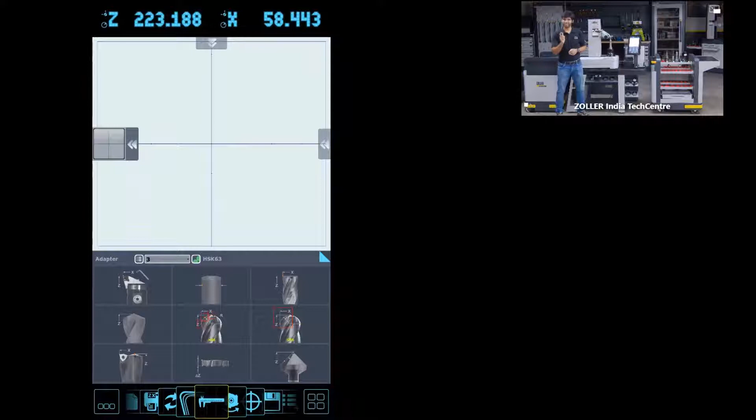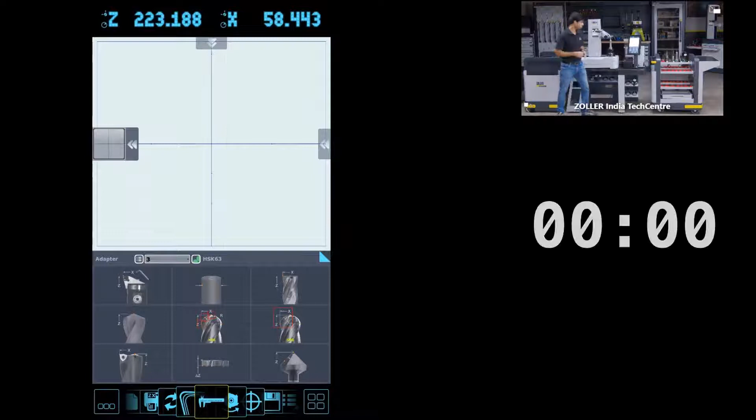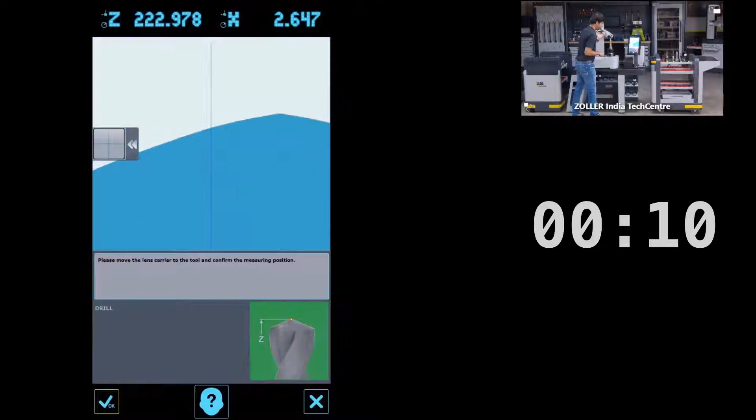Now I'm going to show you how easy it is to measure the height of a drill which we already have clamped onto the HSK63 adapter, and I'm going to do that within 30 seconds. My time starts now. I select the drill option, confirm the adapter which is HSK63, move the camera so the cutting edge is in the field of vision, press OK, and start the measuring process. And it's done—we have the value.

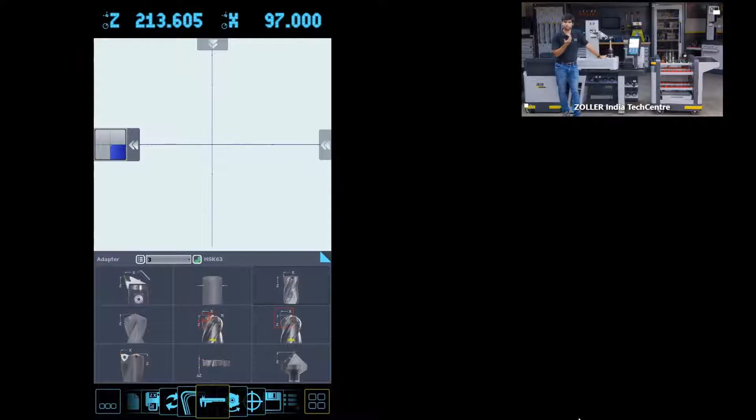Now let's take a look at another macro program, this one for an end mill. I've mounted an end mill here, and this macro is going to measure the diameter as well as the height of the end mill. It also requires us to rotate the spindle by 360 degrees, because it keeps freezing images as we rotate the spindle and gives us the value of the entire rotated contour. The advantage of this macro is that it takes into consideration the radial as well as axial runout when giving us the measurement result.

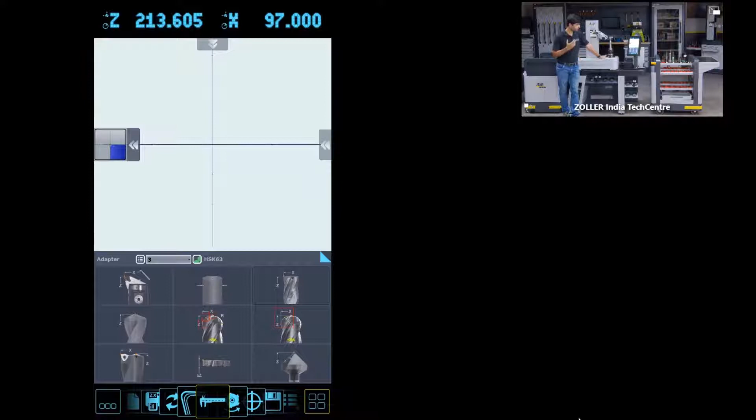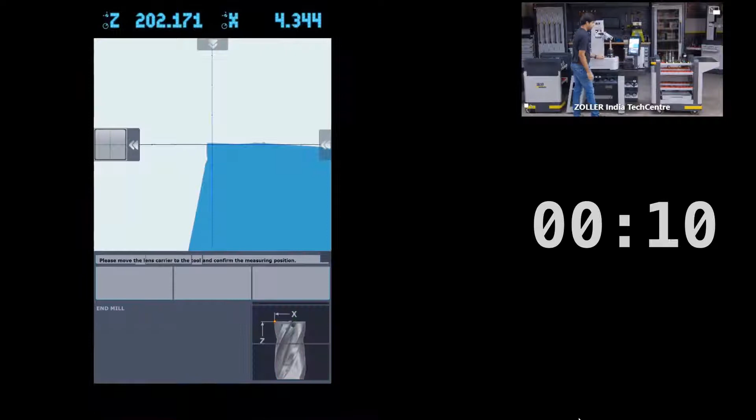And like the drill, I'm going to measure this tool again in 30 seconds. My time starts now: select the end mill, confirm the adapter, move the optics carrier, press OK, rotate the tool by 360 degrees, press OK again, and our measurement result is ready.

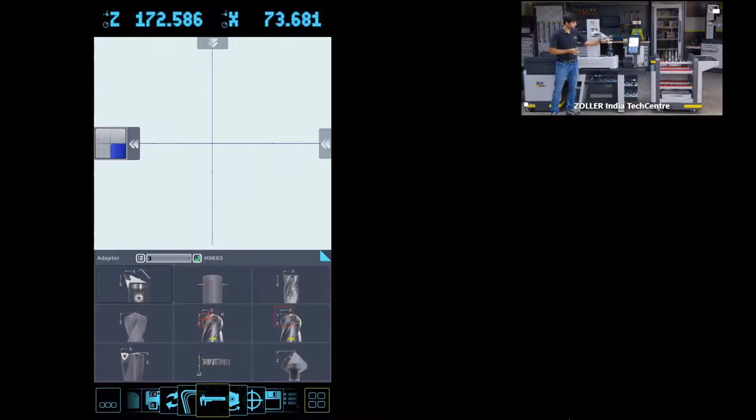Now let's move on to the next tool, the boring bar—one of the most tedious and time-consuming tools to preset, especially on your machining center. Sometimes it takes 5 minutes, sometimes 10, sometimes even half an hour. But on the Smile Compact, I'm going to preset the boring bar to a specified radius, let's say 52 mm, using the special macro for the boring bar, and I'm going to do that within a minute.

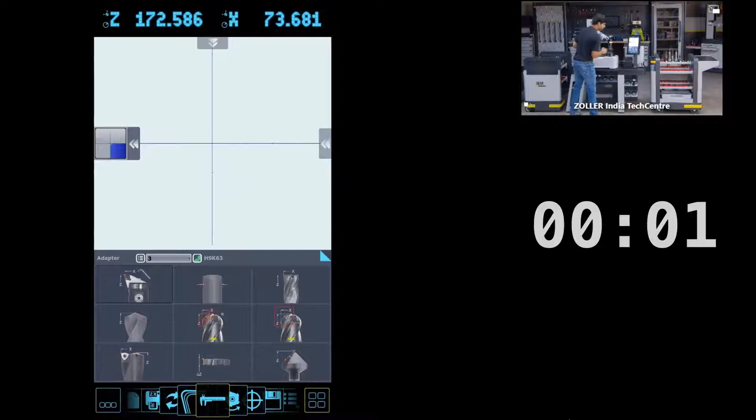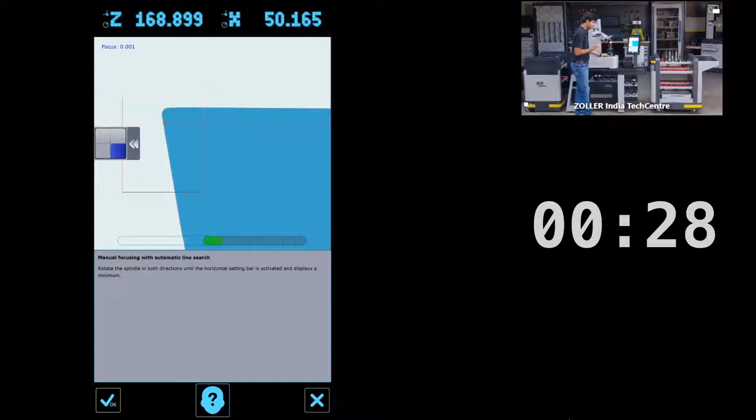My time starts now. I select the macro, confirm the adapter, move the camera so the cutting edge is in the field of view, and set the nominal value at 52 mm. Now it's asking me to focus the cutting edge so it is at its highest point. Now it's focused, I press OK. Then I press the spindle lock button so it doesn't move around when I'm adjusting the boring bar.

And then I adjust the boring bar based on the graphical indication on the screen. What you see here is the real-time value of the cutting edge. I press OK.

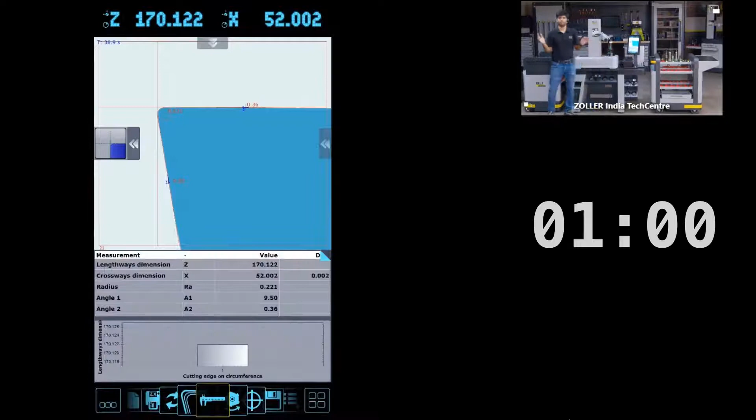And done. So within a couple of microns, we have set the boring bar to the specified value of 52 mm.

Now I'm going to talk about the page where you can create your own tool measurement programs and save them in the library for further use.

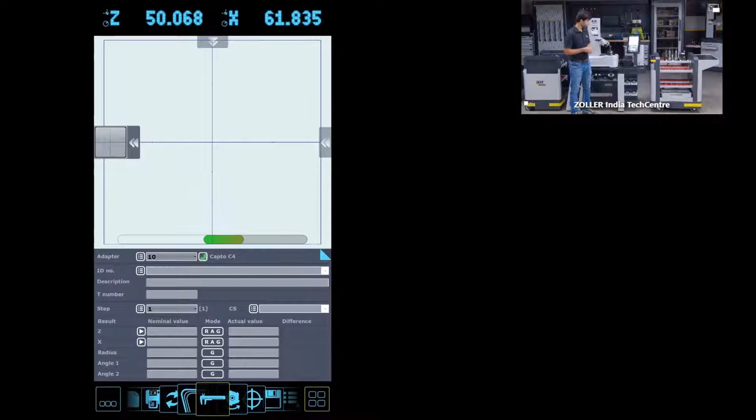So in this case, what I've done is I've taken a Capto C4 tool, and there's a Capto C4 adapter as well. I'm going to move the camera so that the cutting edge is in the field of vision, and once I do that, the crosshairs have automatically jumped onto the cutting edge.

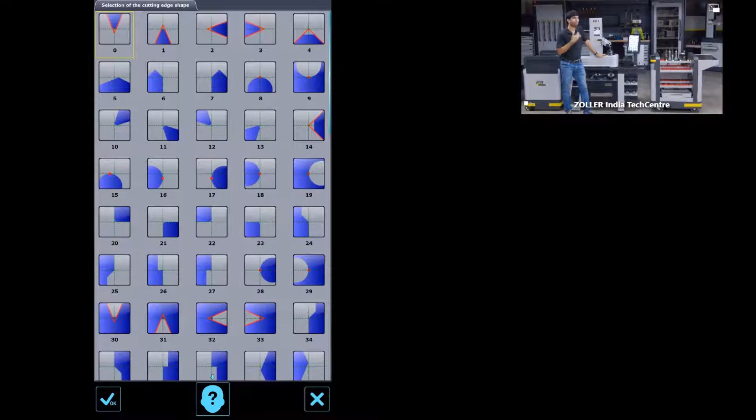This is what we call the dynamic crosshair function of the Smile Compact. In this mode, irrespective of where your cutting edge is positioned, the system will automatically detect the cutting edge, jump onto it, and recommend a type of cutter shape which is optimum for measurement of that particular edge. We have multiple options in the cutting edge shape library, and the system is intelligent and selects one of its own depending on what it sees.

So right now it has already selected the cutter edge shape 21. Now what I'm going to do is quickly create a program. I'm going to show that to you and save it in the library.

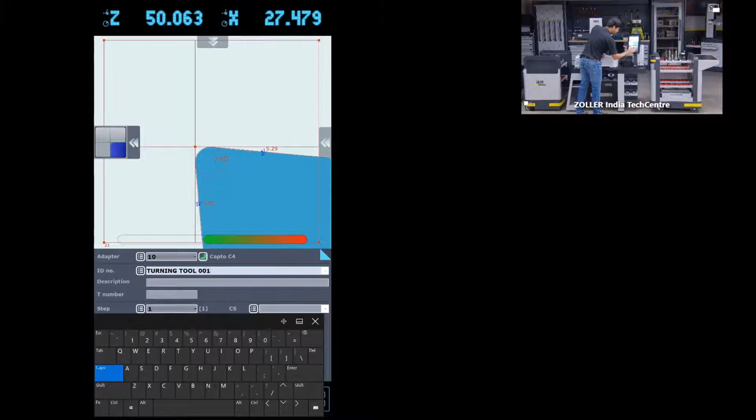First, let's name the tool. For example, turning tool 001. Let's give it a tool number, for example 0075. And then we can input nominal values.

These nominal values are going to stay with the program so that whenever the operator calls that program from the library, the system is automatically going to direct the operator to that particular nominal point. Right now, for ease of explanation, I'm just going to play back the counter values as the nominal values.

I also have an option of adding a tolerance band to these values so that you can measure the tools without having the fear of the measured values being outside the tolerance band.

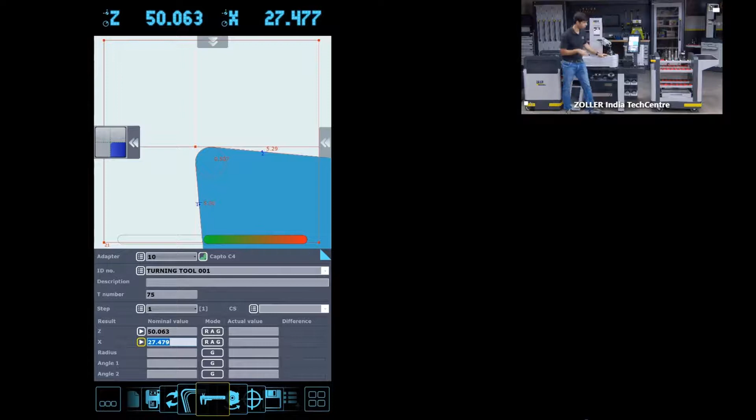Now that I've entered all the required values, I'm going to save this program in the library. In the library, I have multiple options - these are folders that were already created. So I'm going to select CNC2, and I'm going to save that in CNC2.

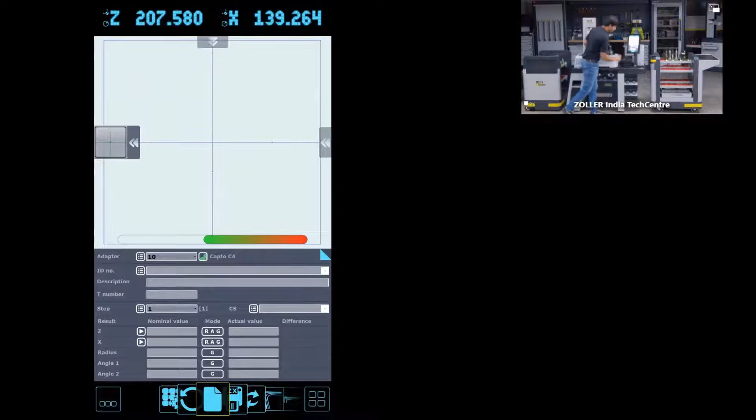Now that the program is saved, I'm going to refresh this page. Now move away the optics carrier. I'm going to access the library and go to the CNC2 folder. Now you see that we had created turning tool 001 with tool number 75. I'm going to select that and press OK.

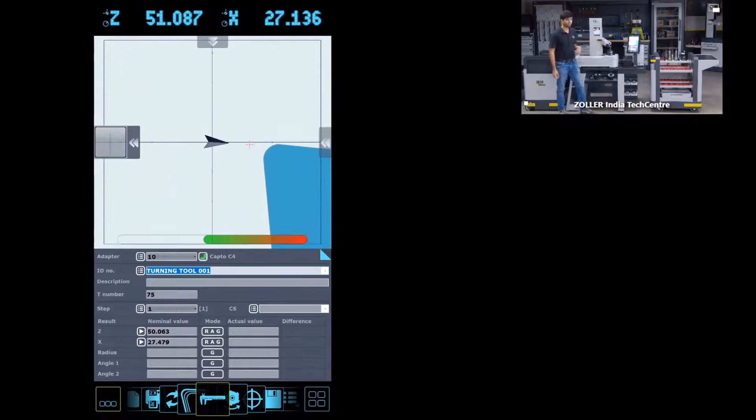You see that the program has already been uploaded, and the navigation arrow is directing me to the nominal position. So once I'm at the nominal position, I can focus the tool so that we are at the highest point and perform the measurement.

And we have our results. So it's that quick. It becomes very easy for the operator to organize the tool measurement data in the library and use that whenever required.

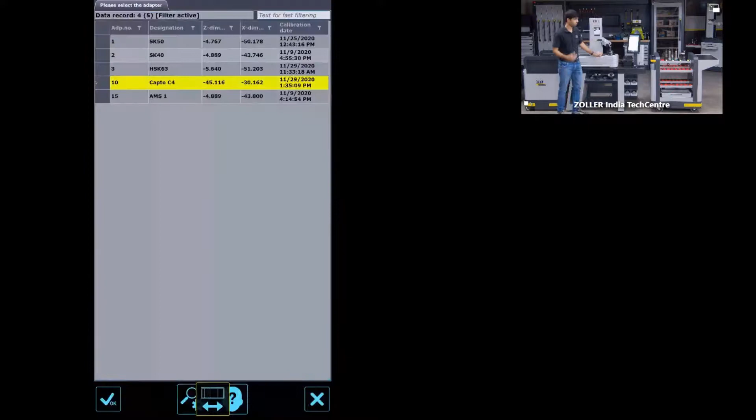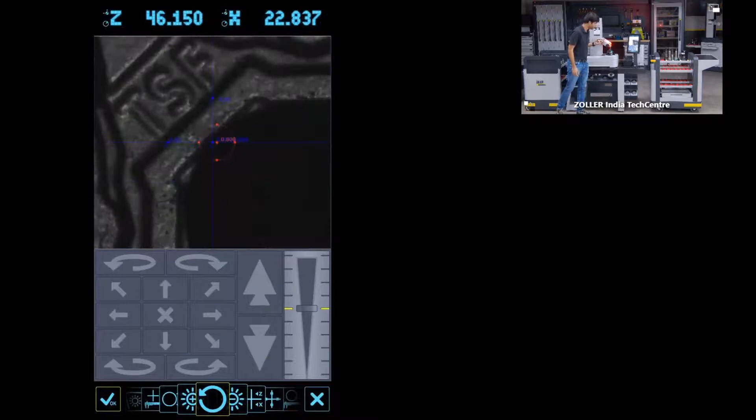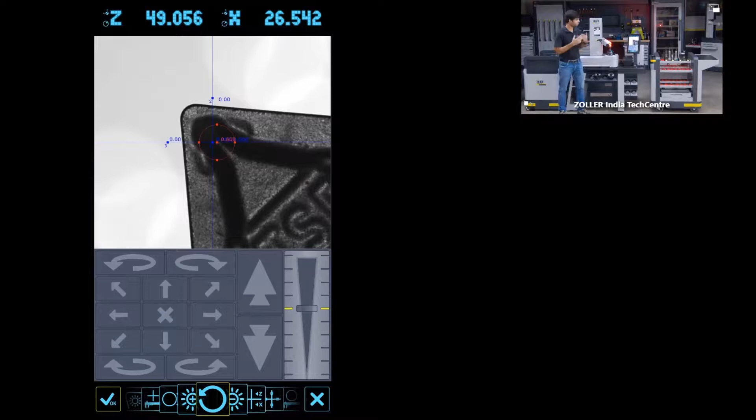Now I'm going to show you an interesting feature, which is the projector mode or the cutting edge inspection mode. In this mode, instead of measuring with transmitted light, we check the tool with incident light. This allows you to inspect certain features on the tool or check whether it's damaged, and at the same time measure the extent of wear with the movable crosshairs.

This enables you to perform certain studies where you can document the performance of the tool. For example, if you believe certain tools from your supplier are not performing well, you can use those tools for cutting a few components, bring them back, check the extent of wear, and take snapshots. That way you can perform a proper, well-documented study for your wear.

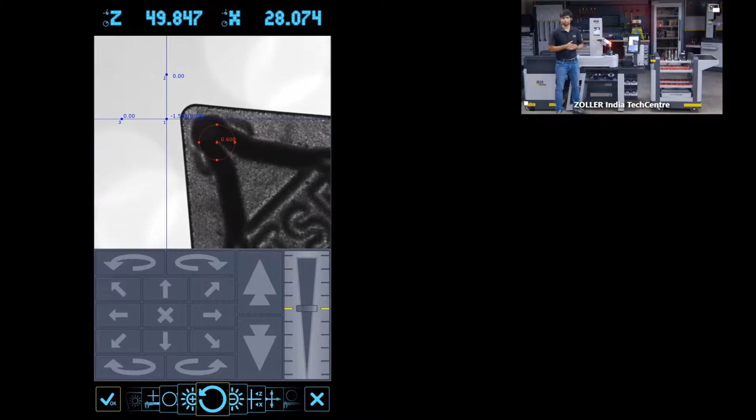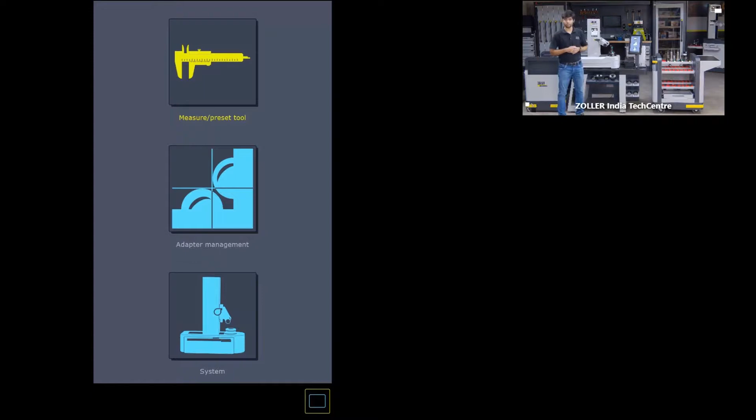Now I'm going to give you a quick overview of the adapter management function. As I said, every adapter will come with a set of referencing spheres with unique values. In order to feed those values into the software, and for the measuring system to understand where to form the references, we have a particular module - the adapter management module.

In the adapter management module, you have a library of adapters that you create based on the type of adapters you're using. If you see over here, there are multiple adapters, and for the ones in use on this particular presetter, we have already specified the values of the reference spheres.

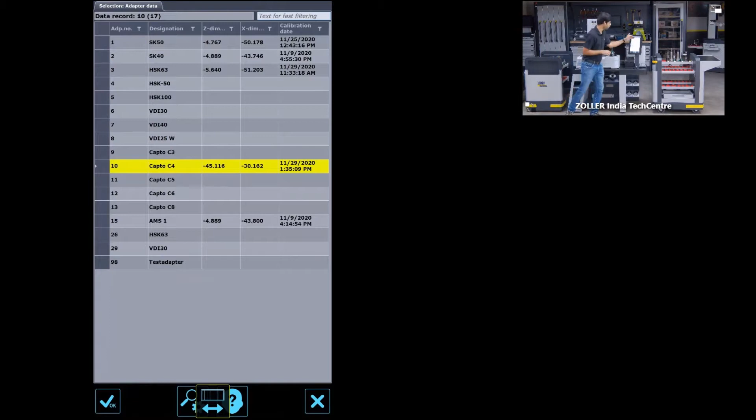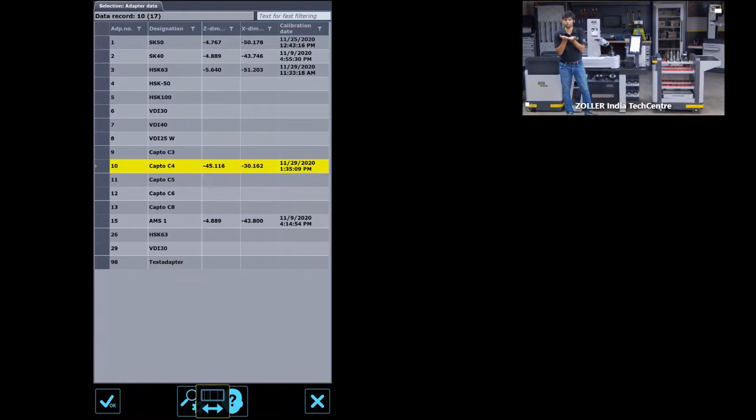The reference sphere values in the Z as well as the X have been specified so that whenever you select a particular adapter and physically use it to measure a tool, the system understands where to form the reference plane or the gauge plane and start the measurement from there. That is applicable for the X direction as well as the Z direction.

To sum it up, I would say that the Smile Compact is a very powerful tool presetter, and irrespective of the number of machining centers you have on your shop floor, it is going to help you drive down your setup time, drive down the number of rejections, and help improve your productivity. So it's more like a money saving machine.